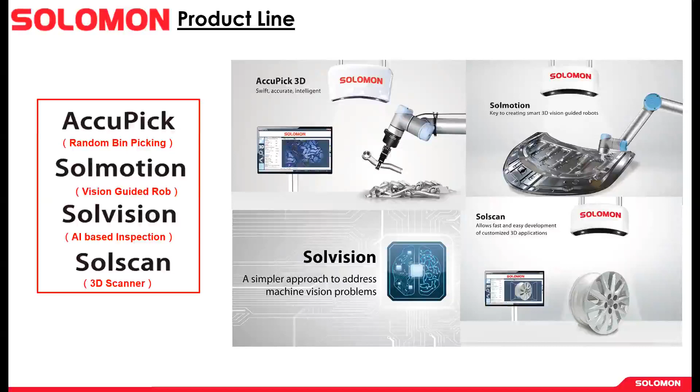Solscan is our 3D scanner hardware. It uses structured light technology to generate a pick position, a 3D pick position.

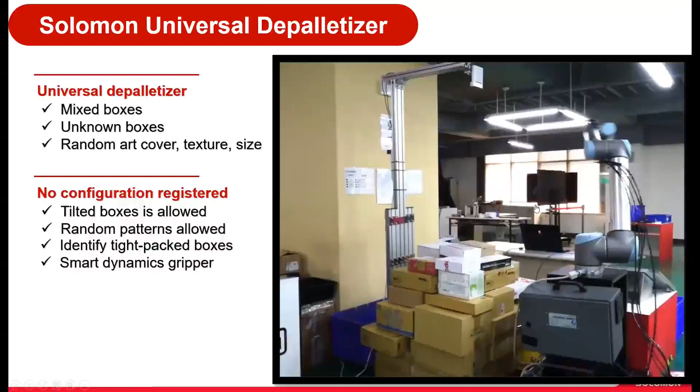So here I have a video of a depalletizer. This is a tool that can be used without any learning. It's a little different from machine learning because we're not actually teaching the system; we're just using a data set that we have created in-house.

Even if the boxes are packed and stacked very closely, we can easily differentiate the boxes and pick them accurately, as you can see in this video. It's using a Microsoft Kinect. The working distance should be anywhere from 1 meter to 2 meters, and we can work up to 2 meters without losing accuracy.

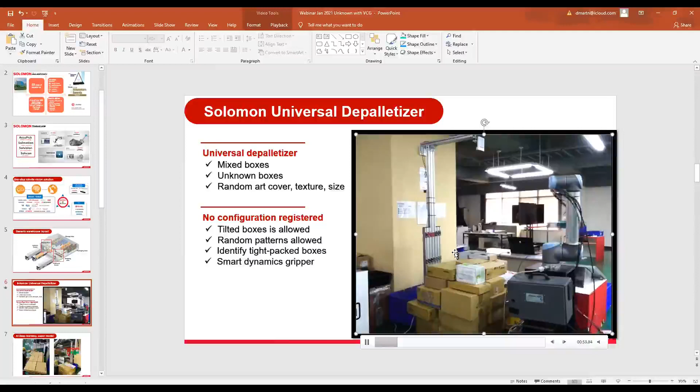So it's just going to keep playing here until it's done picking.

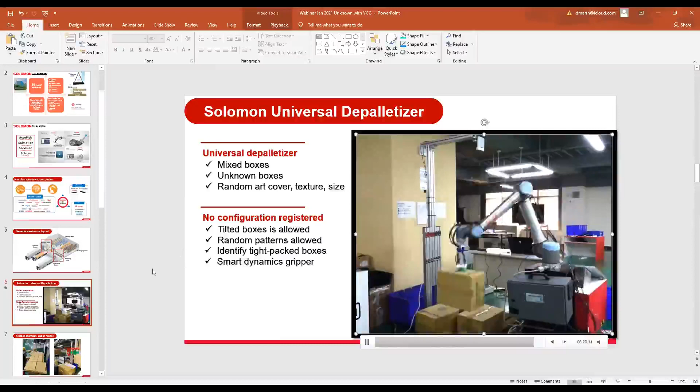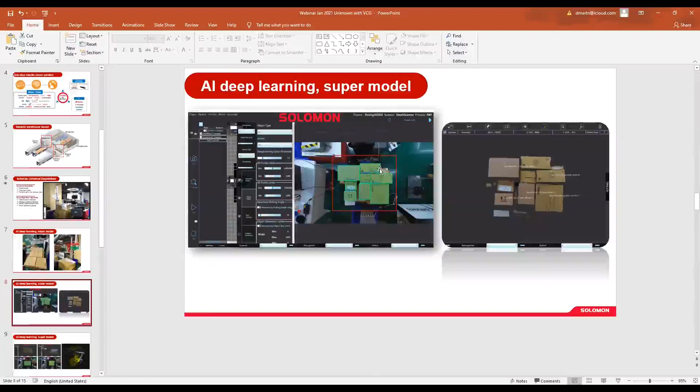This next slide shows an example of how boxes are closely stacked right next to each other. Other software tends to have trouble recognizing these 3 boxes as individual items, instead recognizing them as one item. Here you can see in our AccuPick user interface, in 2D, that all the objects are recognized, and here you can see the pick point generated in our 3D point cloud.

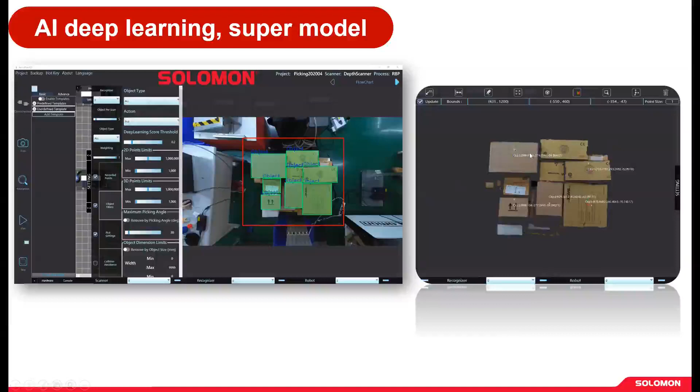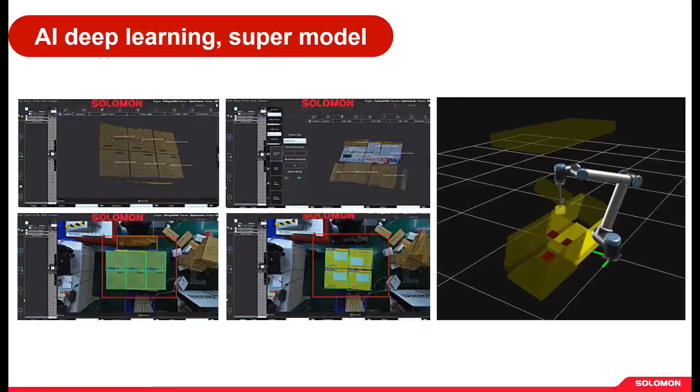Here is another example of our user interface, this one for motion planning. This system is used for avoiding bin collision. We do have basic collision avoidance that eliminates any items that would have a chance to collide with the bin. But this motion plan will simulate a position where it tries to pick without colliding with the bin.

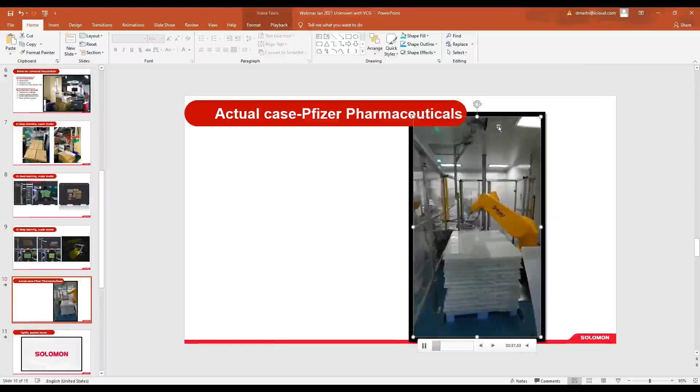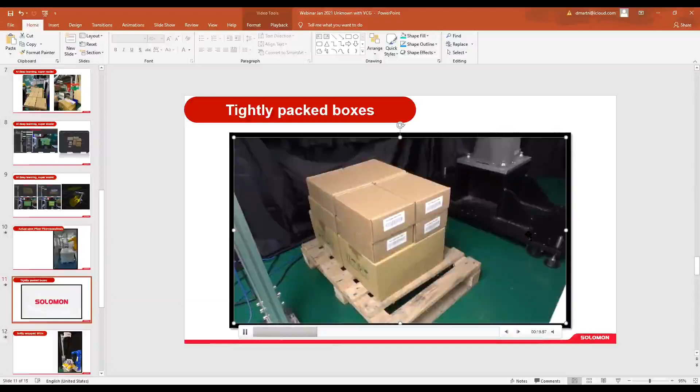Okay, so there is another video. You can see that boxes are stacked very close to each other, and we can still pick them accurately. This is using our Solomon structured light scanner. The difference between the structured light scanner and Intel RealSense or Microsoft Kinect is that the Solomon scanner is more accurate, but scanning time takes a little longer — about 0.8 to 1.3 seconds for processing the image and generating the pick position.

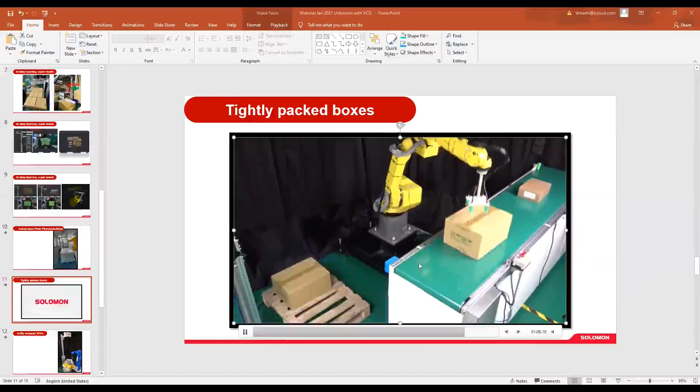For Intel RealSense and Microsoft Kinect, they're less accurate, but their scanning time and processing the image and generating pick position is faster, about 0.5 to 0.8 seconds.

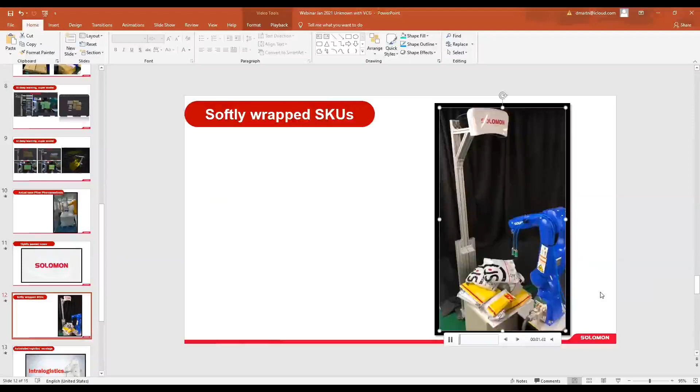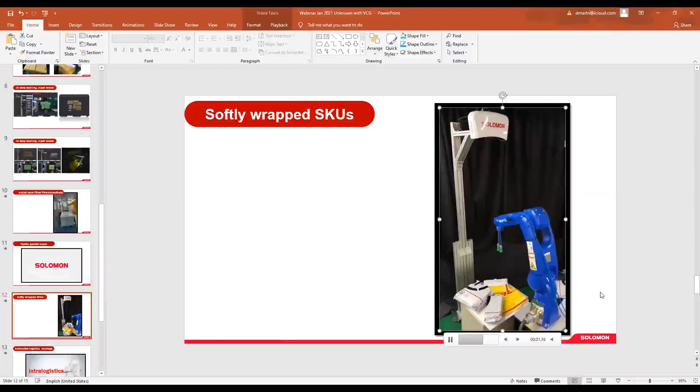Here you can see we can also pick items that are softly wrapped, so we don't necessarily only pick boxes. A lot of these fulfillment centers and logistics have softly wrapped SKUs, and we can still recognize them and generate a pick position.

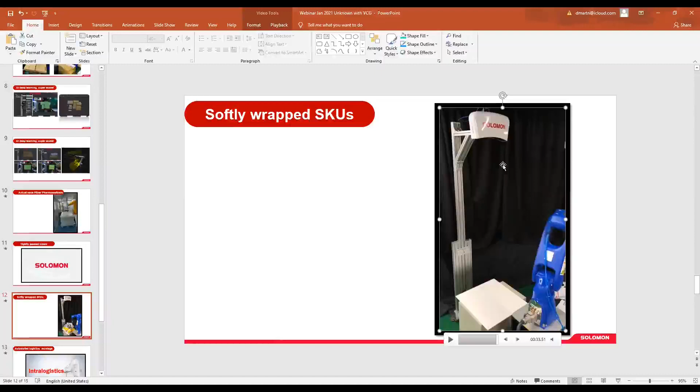Also for working distance, the Solomon scanner can work up to 2 meters without losing accuracy. We can go up even higher, only we will sacrifice a little bit of accuracy.

So in this video, I'm going to be introducing our vision control gripper. It's going to use a Kinect camera, UR Robot, and our newest product, the vision control gripper. This was done by our Taiwan headquarters for demo purposes. Here you can see the Microsoft Kinect at the top.

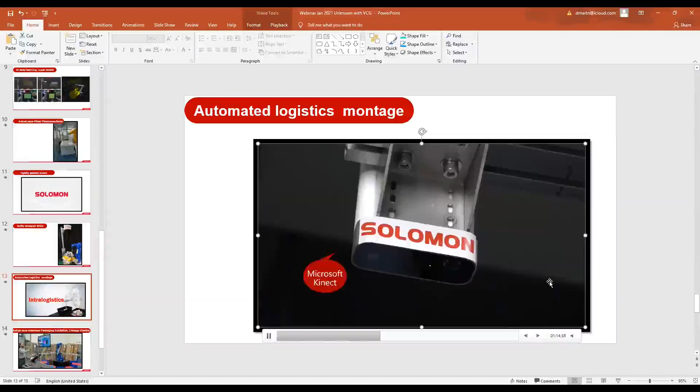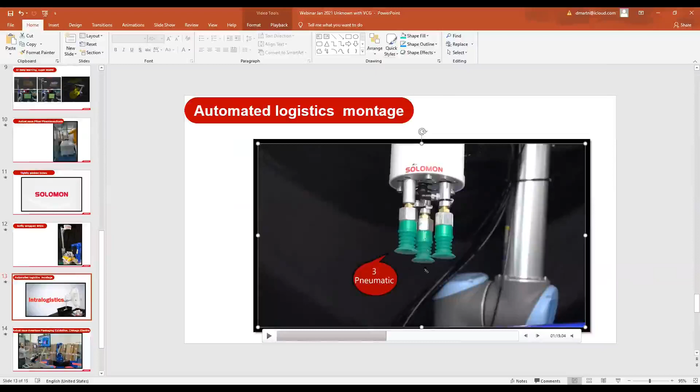So what the vision control gripper does is, based on the picking dimension, it will decide whether to use 1 tool, 2 tools, or 3 tools. You'll be able to see in a moment. For these ones, the dimension is small enough to just use 1 gripper, 1 vacuum cup.

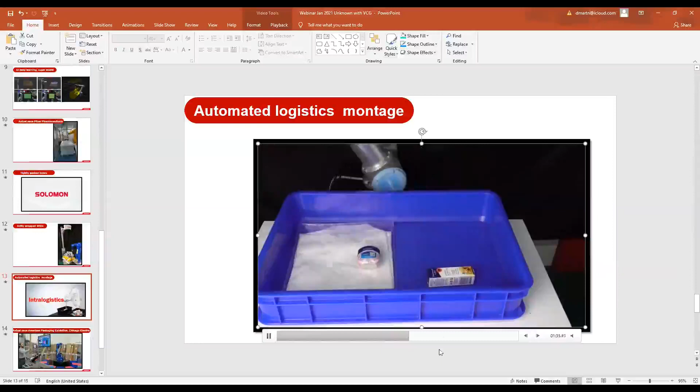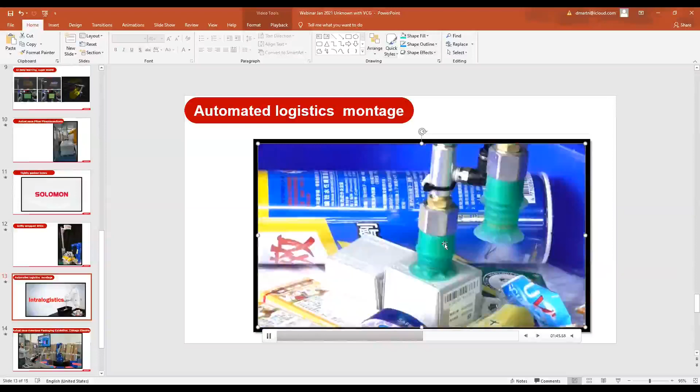In this next video, it will show a bigger item that has a bigger picking dimension. We're also showcasing that we can pick them separately, so here it's going to use 2 vacuum cups.

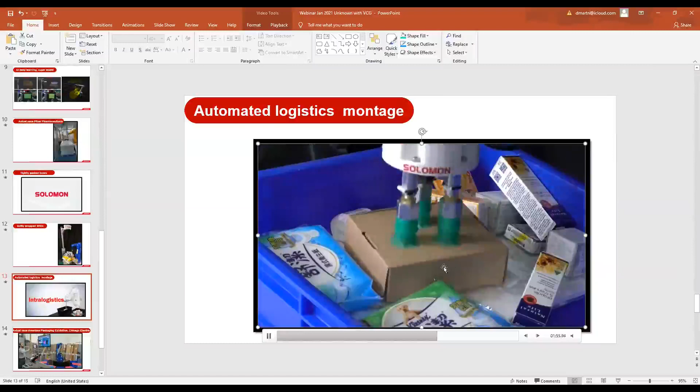Yeah, this one uses 3. So we set the width and height parameters within our software, and the AI will determine whether the dimensions fall within 1 gripper, 2 grippers, or 3 grippers. Now also using 2 cups there.

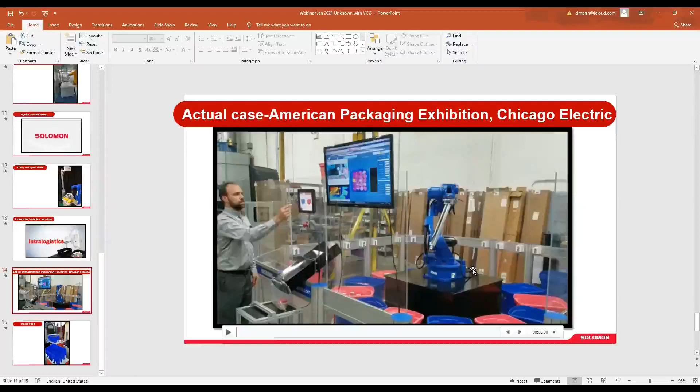Okay, move on to next video. Most of the time we have our camera stationary, mounted on a camera stand. We can also mount the camera on the robot arm. This way, if you have multiple bins, we can still use 1 camera to do a project.

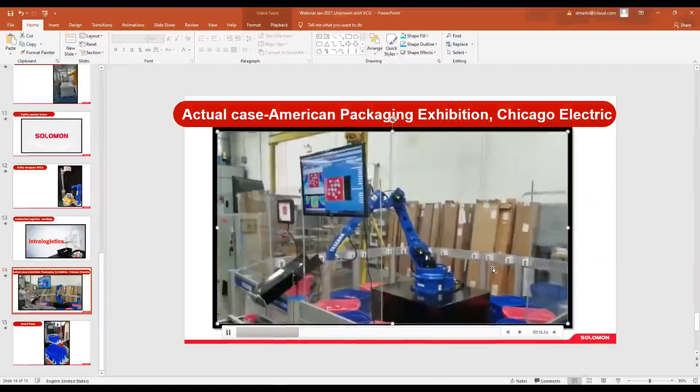So here is a project done by Chicago Electric. It's using Intel RealSense. Intel RealSense has a smaller working distance than the Solomon Structured Light Scan and Microsoft Kinect. We recommend the working distance to be about 50 centimeters, maybe up to 60 or 65 centimeters.

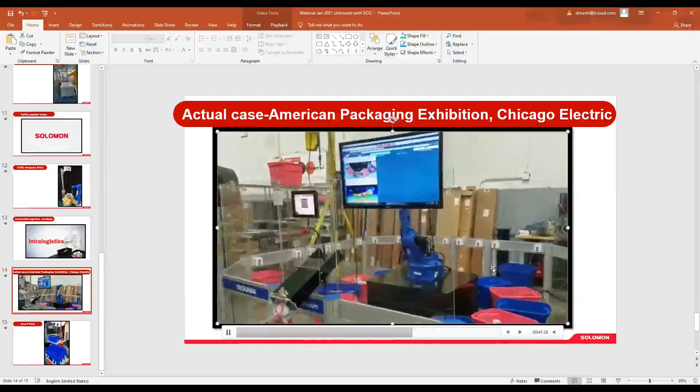RealSense is also good with slightly transparent items and circular or cylindrical objects like this. We believe those items work better with Intel RealSense than Microsoft Kinect. You can see right there the camera is mounted on the arm.

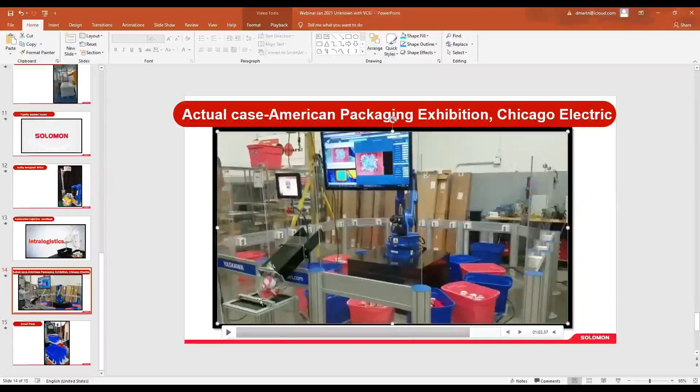So here we also have a tool called SmartPack. What it will do is use the camera mounted on the arm to pick whatever's inside the bin, then it will scan extra time, determine the dimensions, and place it into this bin accordingly.

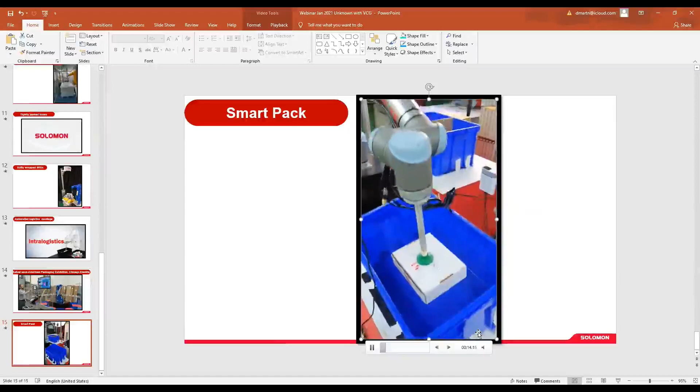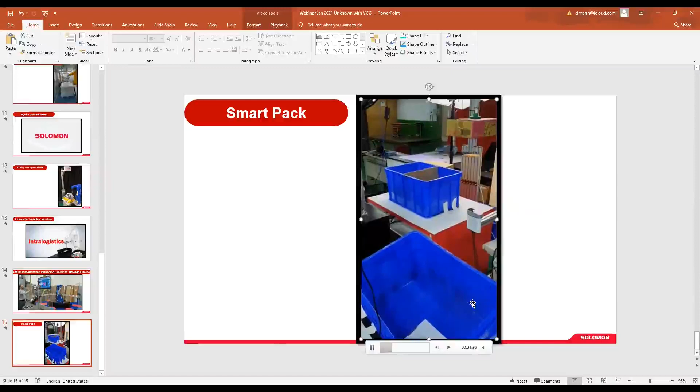In this one, I believe it's using Kinect for both picking and checking the dimensions. You can see here, on the next item, it's going to pick and place in the bin so that it's packed efficiently.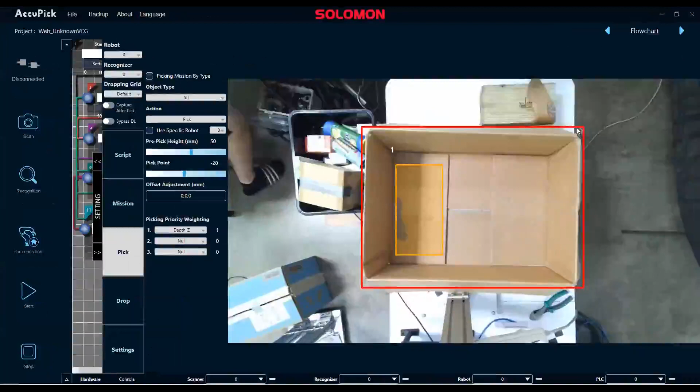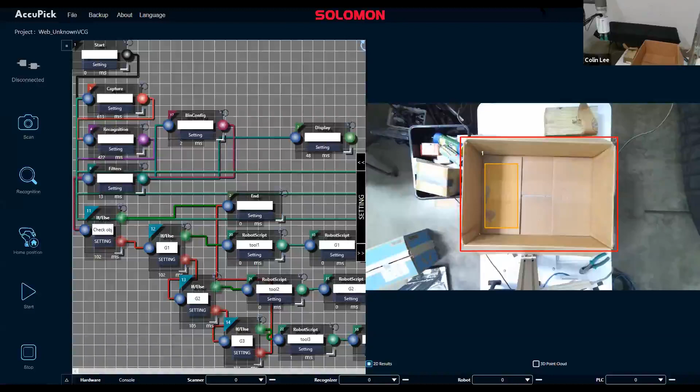So here, okay, let me, okay, there we go. So first I'm going to explain what this flowchart does, and introduce AccuPick to you guys. First we would open the AccuPick software, log in as an admin, and create a project.

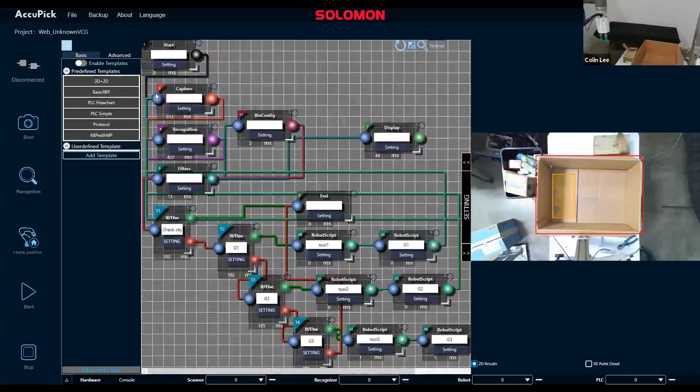This is the project I created, called Web VCG, and I basically used a template that we have. It's going to use capture, recognition, filter and display, and robot script. What capture does is it'll capture the image, and recognition will use a recognition tool that we have.

So we have this unknown segment learning tool. This will bypass any deep learning that we have to do. This was already done by our research and development team back at our headquarters. We have thousands of different images and different items that we pre-trained. So we can just open this, save, and close.

Here, whatever we recognize, we will filter out any bad picks, and we will optimize the most efficient picking. In robot script, we create robot missions. In capture block, we connect camera and robot.

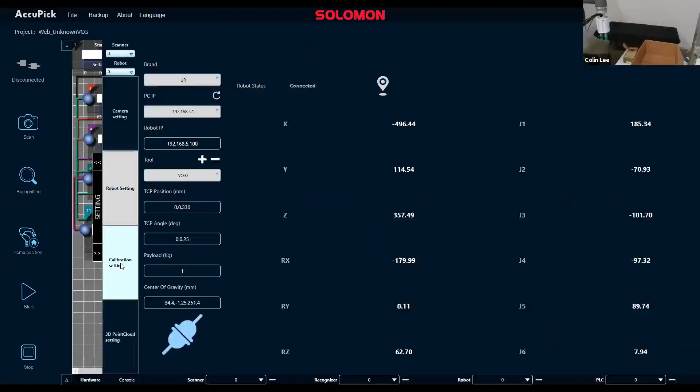For VCG, I have 3 different TCP positions. And then we calibrate within the capture block. Let me just share the whole screen. So we calibrate through the chessboard.

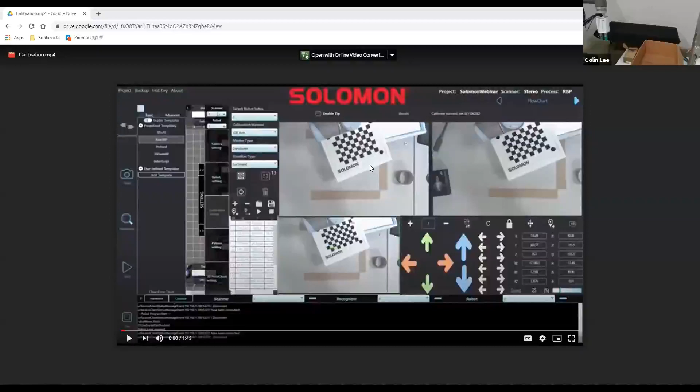We can do it in 2 ways. One way is attaching the chessboard on the end of the robot arm. Or, if you have a straight tool with a pointer, we can point out 3 different positions on the chessboard corners. We can calibrate through there.

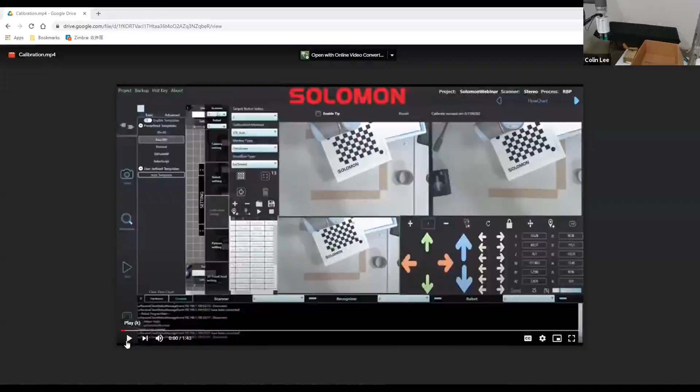With the chessboard attached on the arm, we take 20 different positions, and it'll calculate based on the corners shown on the camera. We do about 20 images, and after that it'll give us a result - an error score, and then XYZ position errors.

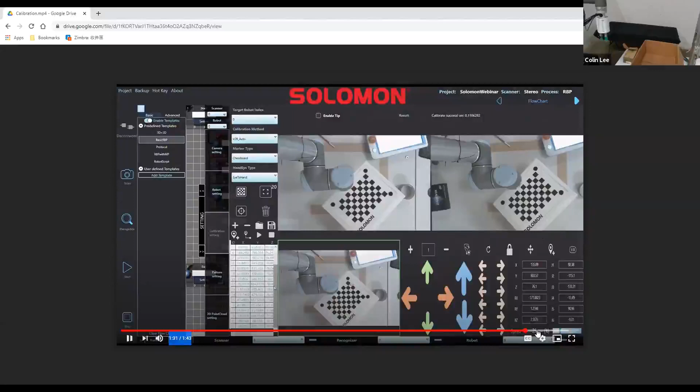For camera, as long as it falls under 0.2, we consider that success. And anything below 3 in translation error, we consider that success as well. The rotational error usually falls below 1, so we don't stress too much on that one.

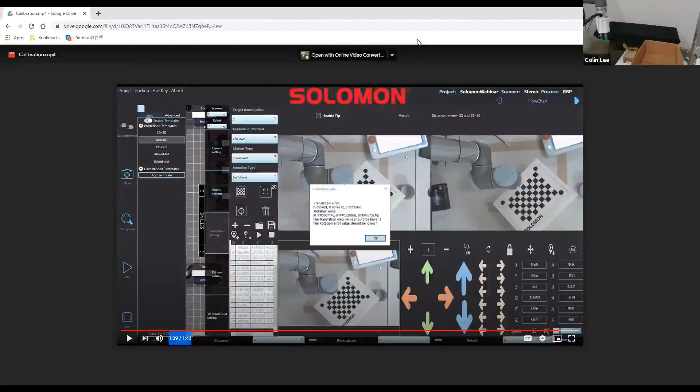Okay, go back to AccuPick. So after the calibration is done, we have already chosen the unknown segment tool as our learning tool. We can do a rotation.

Let's say we want to have a faster cycle time. The rotation of the robot usually slows down the cycle time, so we would always force rotate to, let's say, robot arm X. Then we will always have the arm face that way, and we don't have to consider rotational time.

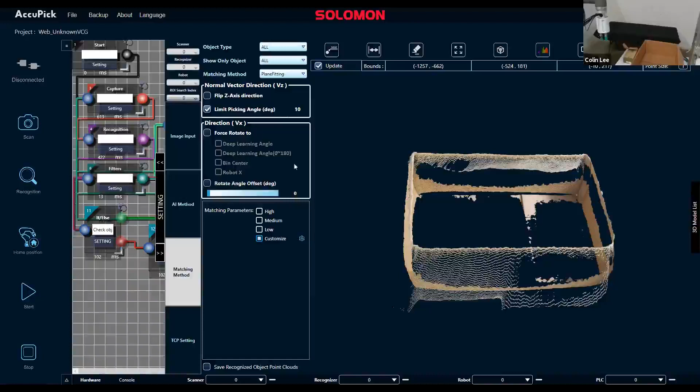So for VCG, visual control gripper, we set it here in the recognition block under TCP setting. We check this, and then I have a G1, which will use the 1 vacuum cup. And I have a width range here, so whatever the score falls between.

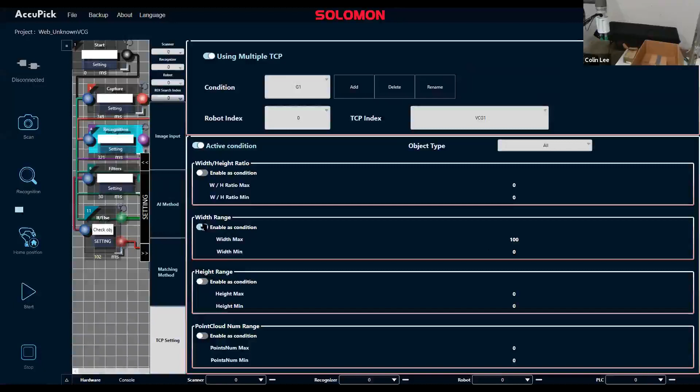Okay, so I go to display to check the images. Here, object dimension - this is the width and height. For three vacuum cups, we will be using that with the biggest object. We can pick this one with the one vacuum cup - you can see it's only 63 by 44.

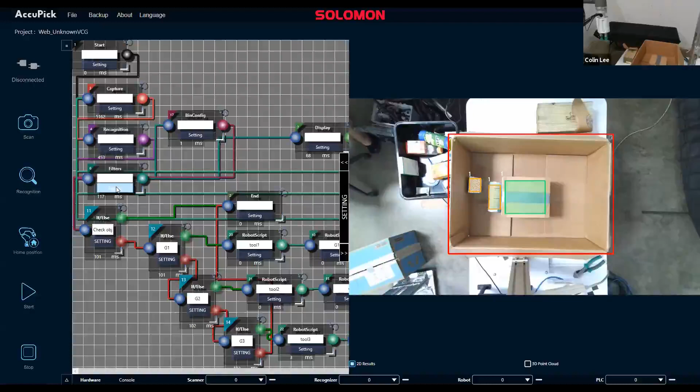So we will make sure that in our multiple TCP with the gripper one, which only uses one vacuum cup, we make sure that it falls between 0 and 100.

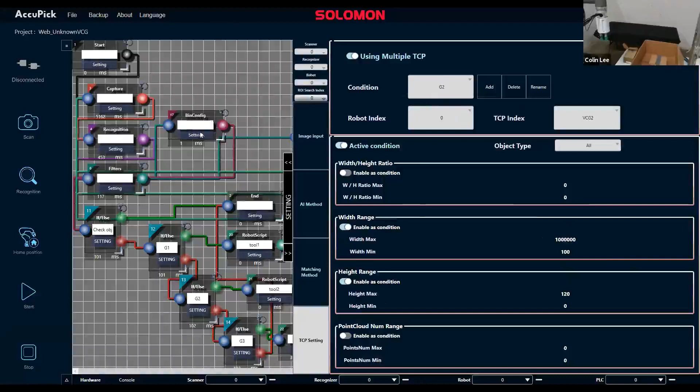And vacuum cup 2, I have it like this, but the difference between the cylinder object and the box was the height. The height was only 34 on this one, and height for this one is 162. So I make sure to have the gripper 2, which uses 2 vacuum cups, doesn't exceed 120.

So on G3, which uses all 3 vacuum cups, since with 3 vacuum cups it should be able to pick the biggest item in the bin, I can do 100 to the biggest object in the bin.

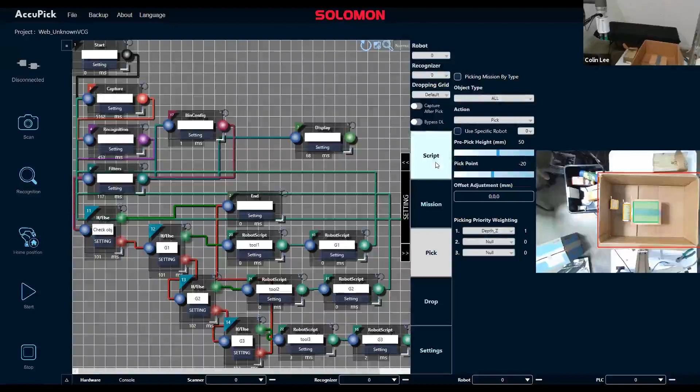So I have an if-else right after the filters, which is just checking if the item is present in the bin. This if-else checks - if there is an item inside the bin, then I check to see if it's going to use gripper 1. If it's treating gripper 1, I have here that...

I'm going to have an IO pop out, so one tool will pop out. Yeah, so that will pop out, and it'll run the picking mission here. And if not, I have a 2.

So if it's not gripper 1, it'll use gripper 2. It's going to check if it's going to use gripper 2, which will use 2 vacuum cups. And I will check to see here - so it's going to use 2 vacuum cups there. And if it's not using gripper 2, I'm checking to see if it's using gripper 3.

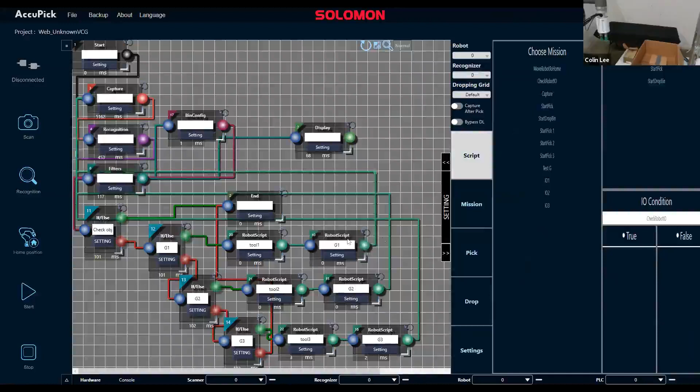And I use all 3 vacuums. So in each robot script here, G1, G2, G3 robot script, it's going to run. Also, basic of our robot missions is going to run a start pick and start drop. What this will do is in start pick we create missions so that

it goes over the arm, or we make sure the arm goes to the bin, and we go to pre-target position, which is about 50 millimeters above the target, and we move directly perpendicular to the item, and I turn on the IO, then I wait for a split second to make sure that it grips properly, and then go back up to pre-target position, which will be positioned on top of the bin. And this is the last position, the start pick, which would just be outside the field of view.

I also can have this checked so that our cycle time could be faster. What this will do is it will try to scan while we're doing a drop mission. So the drop mission is simply move to this position, and then we're going to turn off the vacuum cups, and then it's going to just come back up.

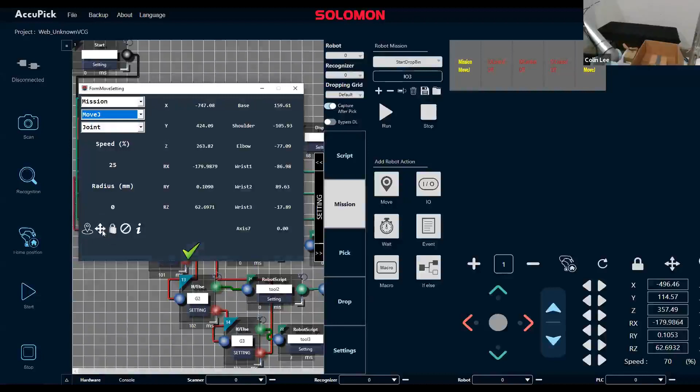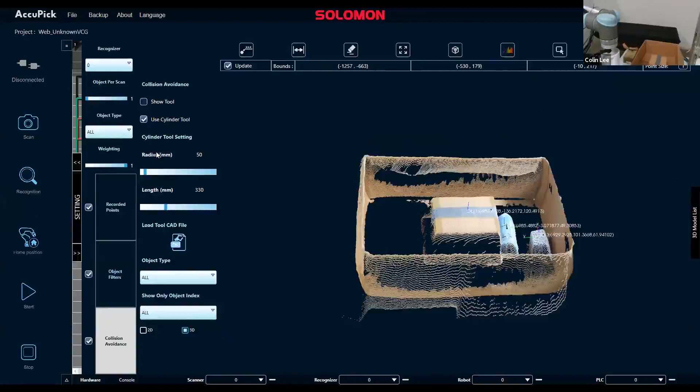I also have set a basic collision avoidance. So I've set this just by checking the cylinder tool, and I measured how big our gripper was, and then both radius and length. And if I show the tool, you can see how the pick, or how the arm, is going to go in for the pick.

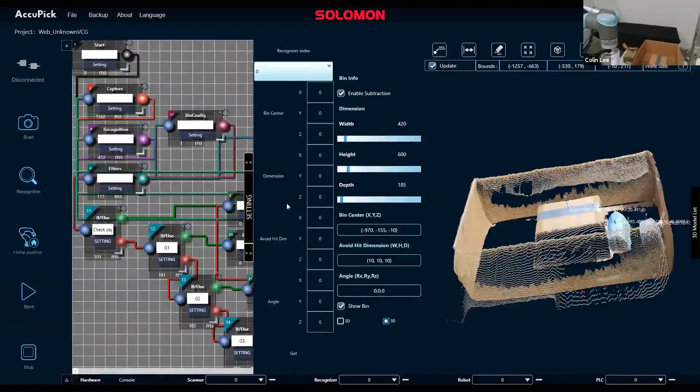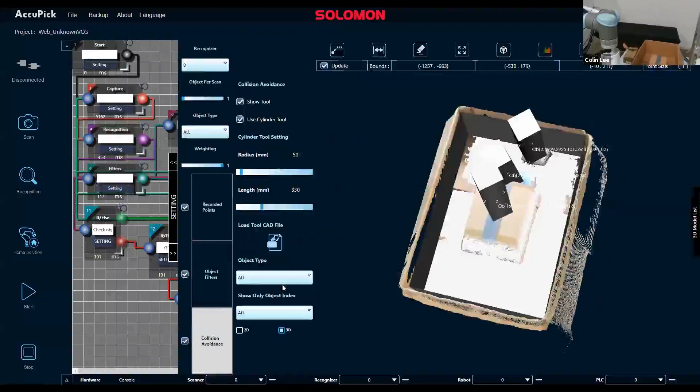And I also have this bin config, where we input the bin information. And then you can see in 3D how the bin looks like. So if we have created the bin config, and we've checked collision avoidance, and we set these parameters, then it's pretty much going to eliminate the possibility of collision.

Okay, I will place more items inside the bin, to show. So it's using 3D. So basically, whatever is the highest inside the bin will be the priority pick.

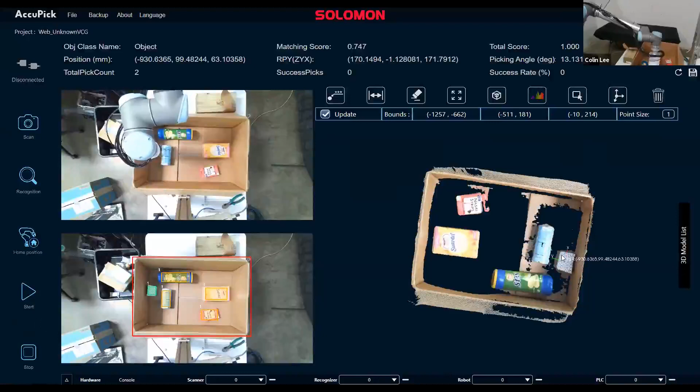So there, you can see here, it was a 2-finger. Now it's going for the 1, smaller. Missed the pick there. We can also have a digital in setup so that we can check whether the pressure is there. That way we know if it's picked or not, and we don't have to go for the same pick.

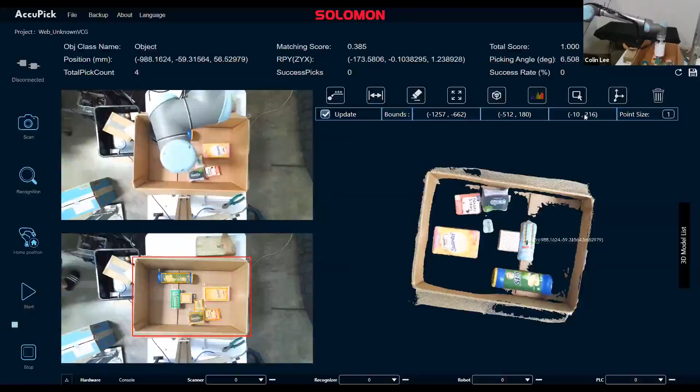So that's pretty much the basic idea of how we create a robot mission, or create a project within AccuPick.

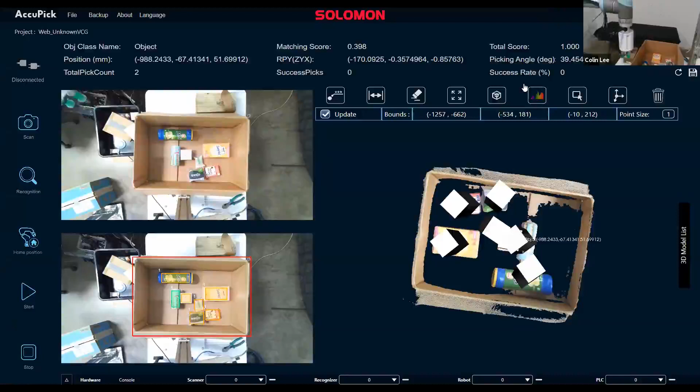So if you're interested in machine learning, this is pretty much the same idea, except that we would actually create a learning tool here, and we take images of the item, and then we would go through the deep learning.

Has trouble picking this item.

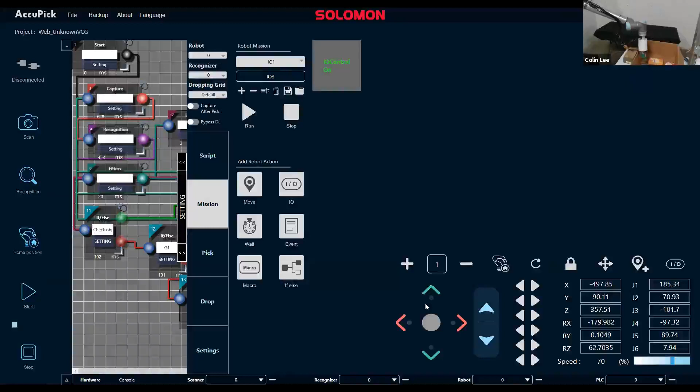Okay, so at this time, we can take it, it did a collision with the bin. I think I didn't set the tool properly. I didn't account for the tubes there.

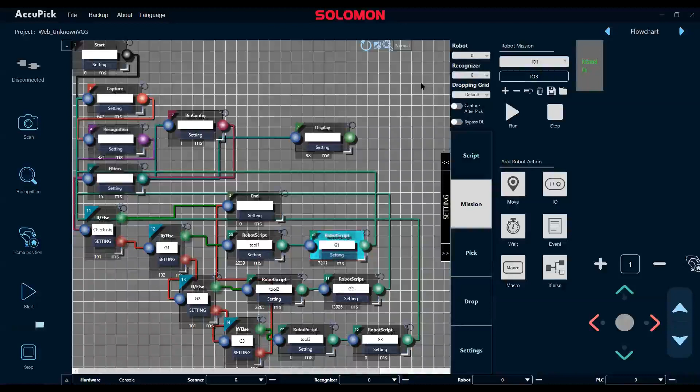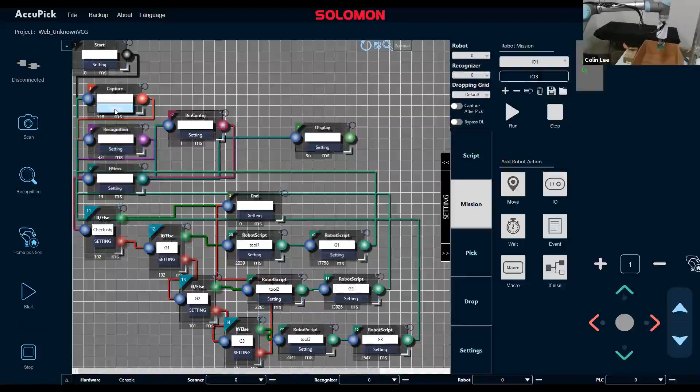I also have to delete some point cloud so that it's not trying to pick the bin up.